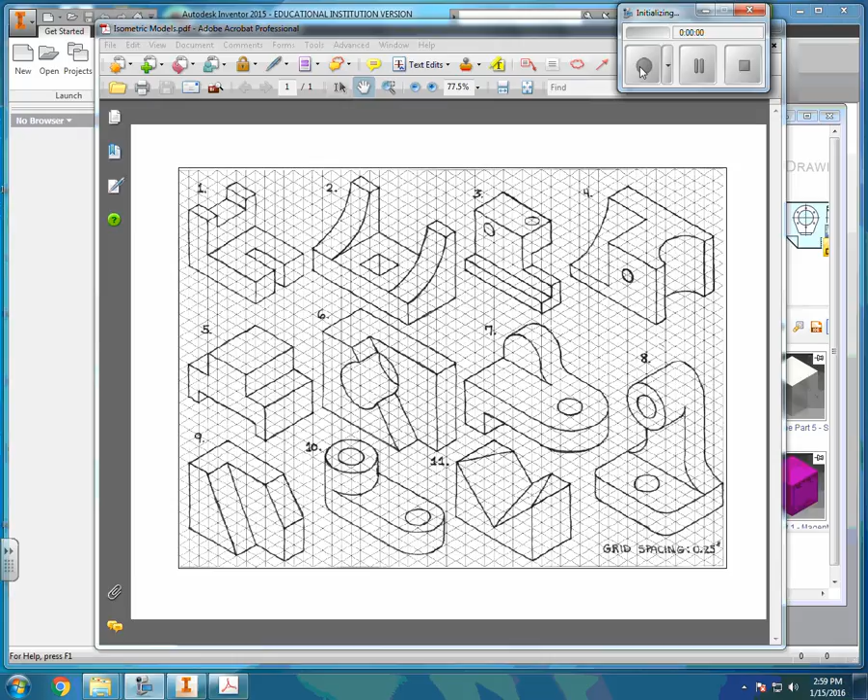Welcome to the tutorial for isometric model number 11.

Here I'm going to show you the part that will be demonstrated in this tutorial. Number 11 looks like it starts with a block and then has two triangles. It looks like we might have to use the loft cut feature to cut this triangle part. You might think you could use the extrude cut feature on the triangle, but they are in two different sizes, so I'll show you how to do that properly in Inventor.

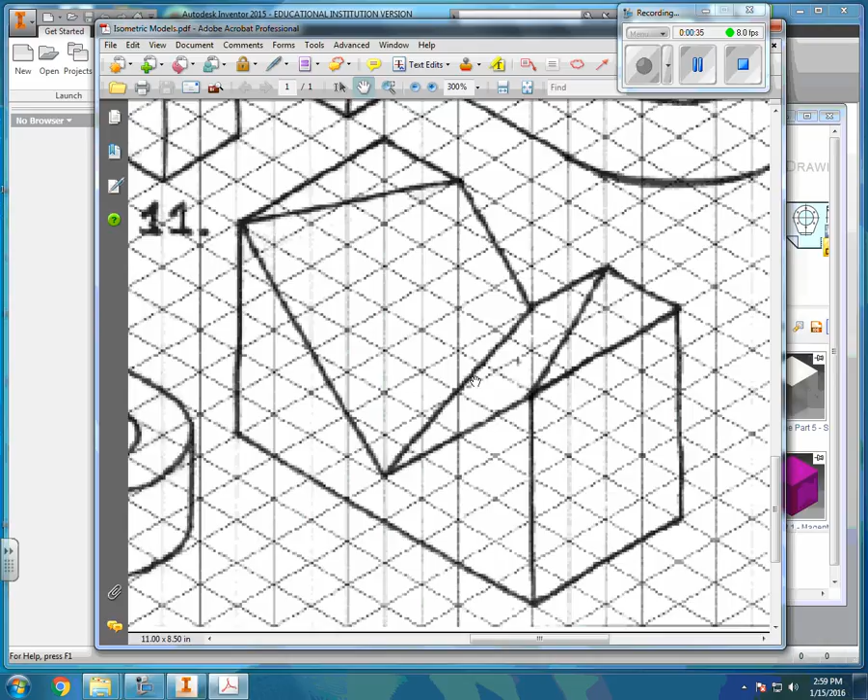Go ahead and open up Inventor. I'm going to minimize this so you can see what the part looked like that we'll be modeling for this tutorial.

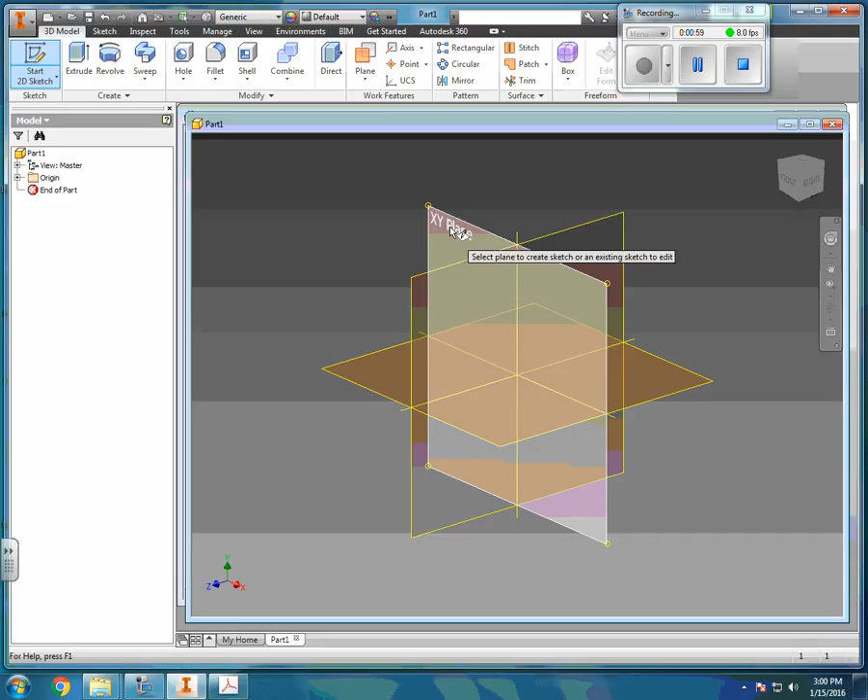Now that Inventor is opened, I'm going to create a 2D sketch. It's going to bring up the work planes here. I'll click on the XY plane and create a 2-point rectangle, lock it at the 0,0 coordinate, zoom out, and create the triangle.

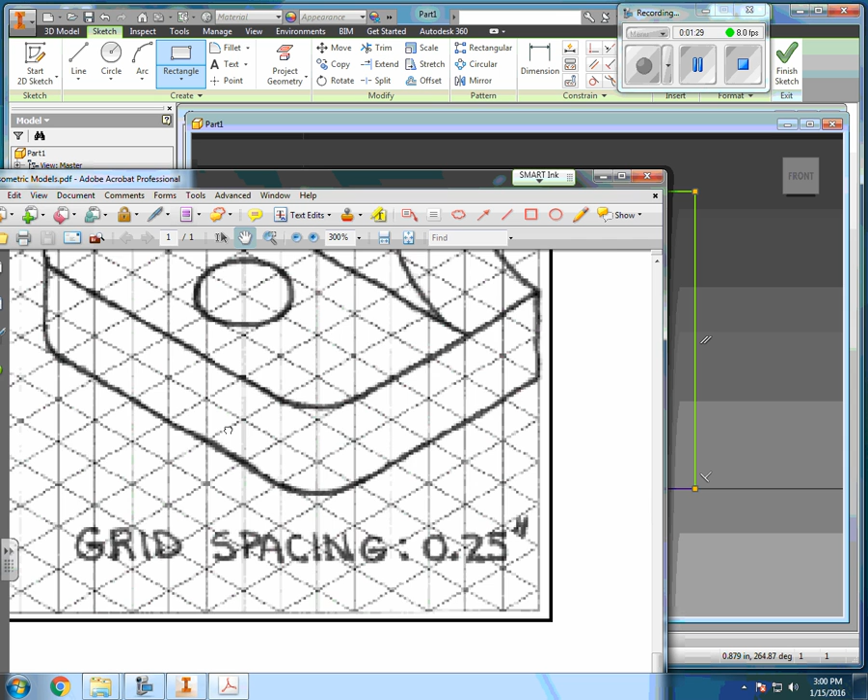I don't have to be exact because I have the dimension feature to set it. Now if I look at my part and count how many blocks there are, remember the spacing is 0.25 for every grid space. So it looks like 2, 4, 6, 8 - the length of this front view is 4 and the height is 2.25.

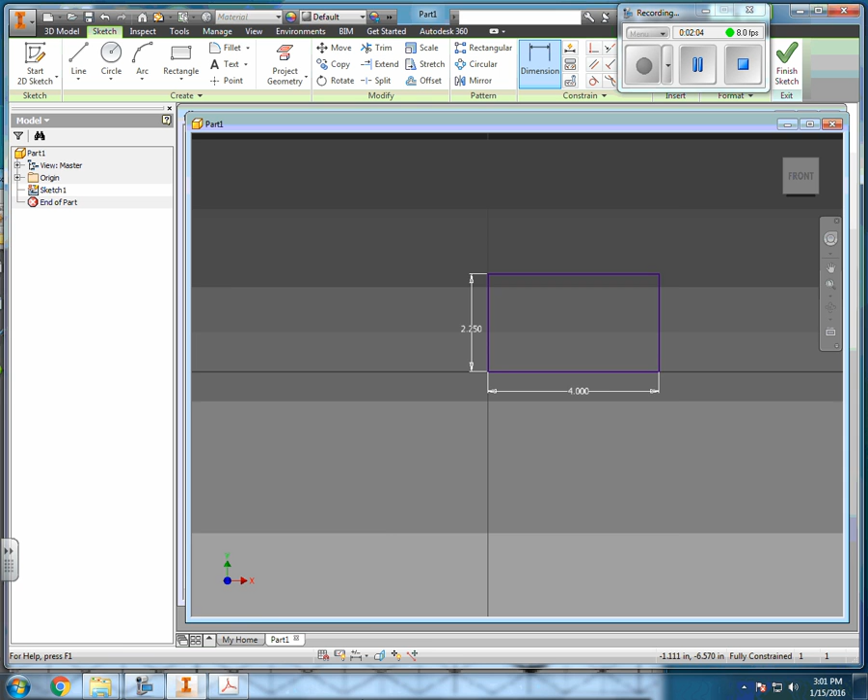So I'm going to dimension this length. It was close, but it's actually 4. Let's see how close I was here - closer. And set that to 2.25, and now I have a block set to the front part of this shape.

Now if you look at the shape, ignore the triangle for now because we're just going to create this box, or rectangle, and extrude it. I'm going to look at the depth of this rectangle - looks like it goes back 8 spaces, which will be a depth of 2. So with that, I'm going to finish the sketch.

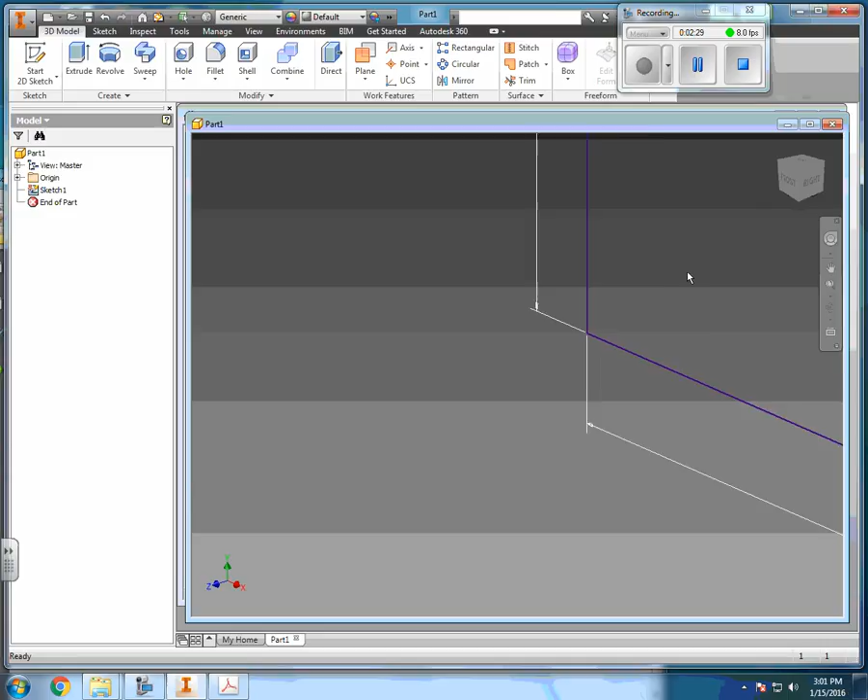When I finish the sketch, I'm going to extrude. I like to put it in the back direction, but you can choose forward, back, or equal distance. Go ahead and bring it back - we looked at that and said it was at a depth of 2. I'm going to hit OK. So there is my block.

But now what you notice from the drawing is that there are these 2 triangles, right? So there's one triangle here and one in the back. Let's go ahead and draw this first triangle.

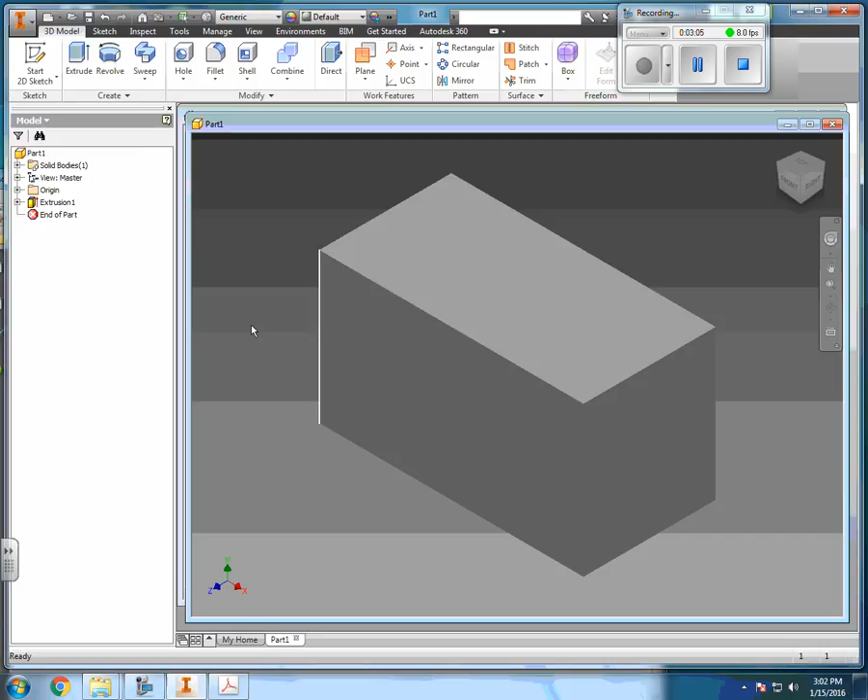I'm going to go back and create a 2D sketch on my front view. I'll use my line feature to draw my triangle, trying to pick up the midway point because I see from the isometric model drawing that the triangle actually meets that point.

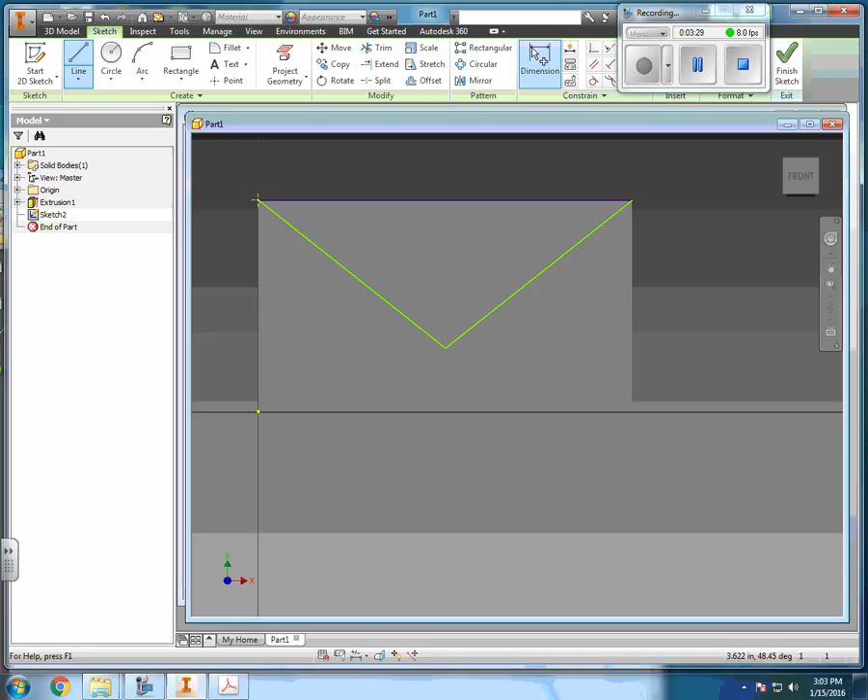Once I do this, I'm going to go to dimension and set my constraints for this triangle. What I notice here is the distance of the point of the triangle to the edge is 0.25. So I'll dimension the edge to the point, and it looks like it was at 0.25, 1 block. Now you notice how yours might not do this, but mine did.

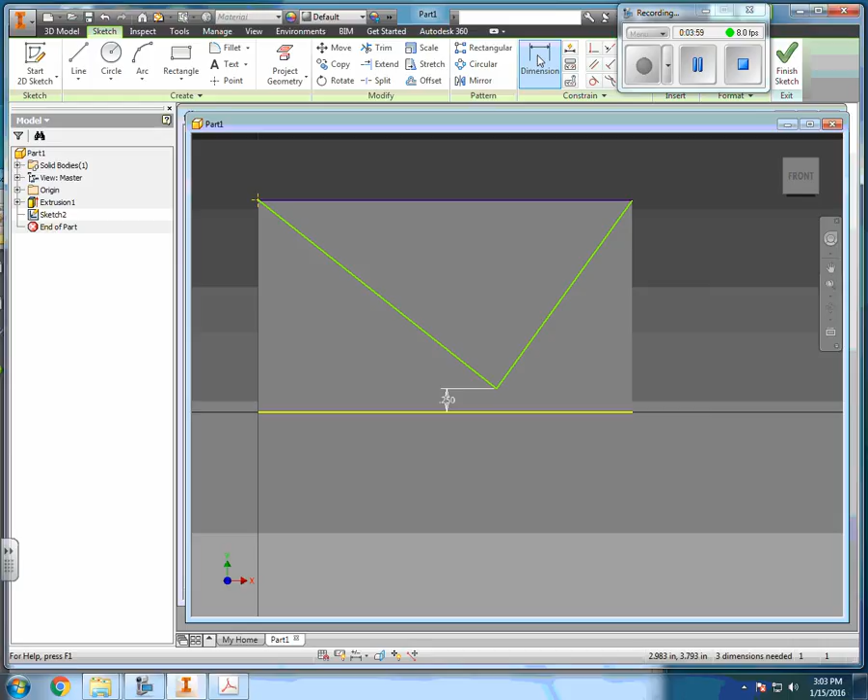It actually shifted, because I have to constrain this to the other edge of this block. As I said earlier, if my total length is 4, it looks like it's constrained at the center, so I can do a trick here and go 4 divided by 2, or you can just type in 2. Just wanted to show you that.

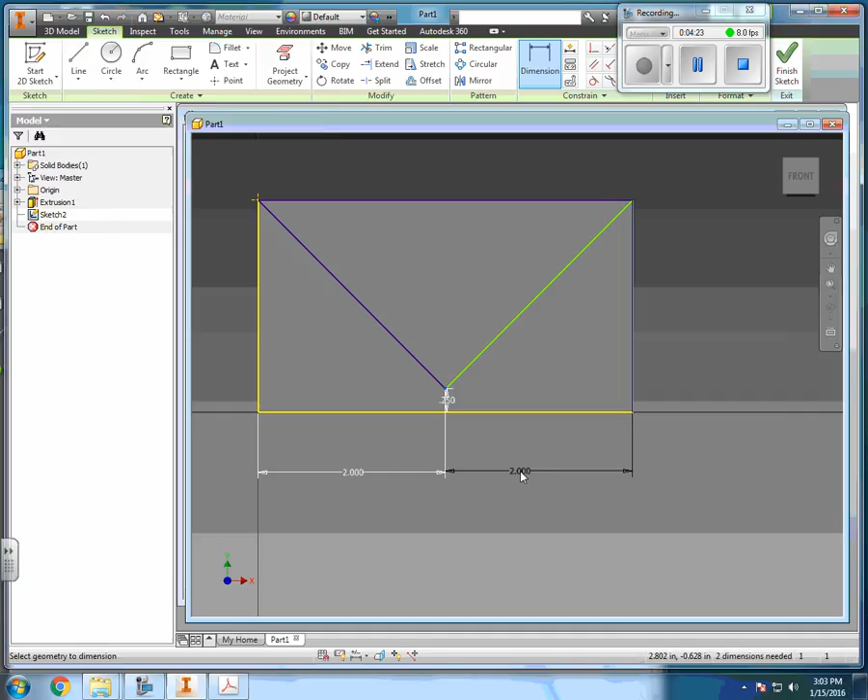Now this line is green, so I'm going to see if maybe I can constrain that too. Once I've completed this sketch, I'm going to finish sketch, and you can see my front triangle is here.

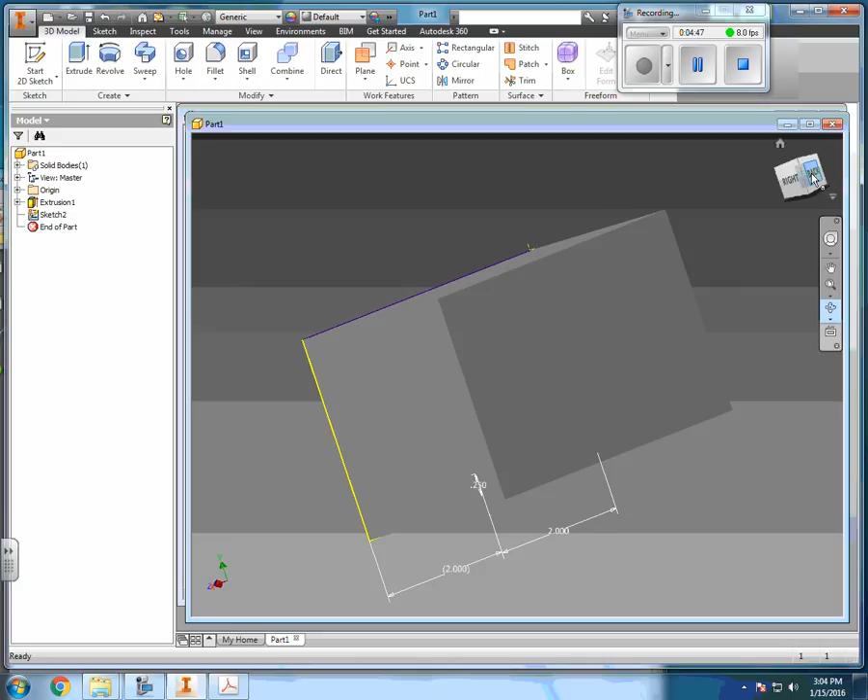This time, usually we'd go ahead and hit extrude, but if we were to do that, it would extrude straight back, and that's not what we want. So what we need to do is create another sketch in the back of our block, which will accommodate for the small triangle back here that we need to loft cut to. I'm going to create a sketch in the back.

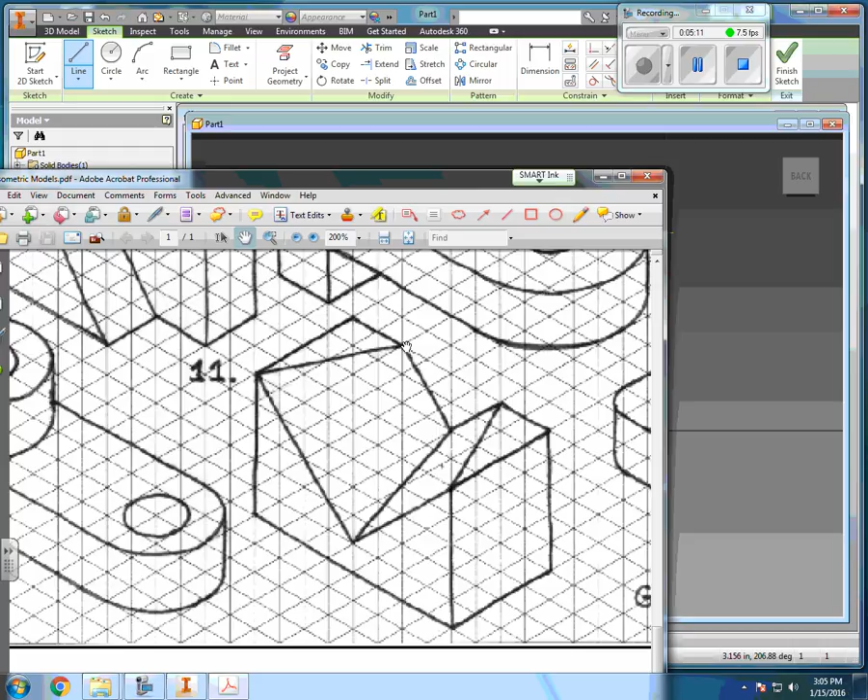That should take you to sketch 3 if you followed the order I did here. I'm going to create a triangle, and this time you can tell from the drawing that the triangle doesn't meet at the very edge - it comes out 0.5 from both ends and then dips down. I'll draw the line and drop it on this line, trying my best to lock it in the center, but we can adjust that later.

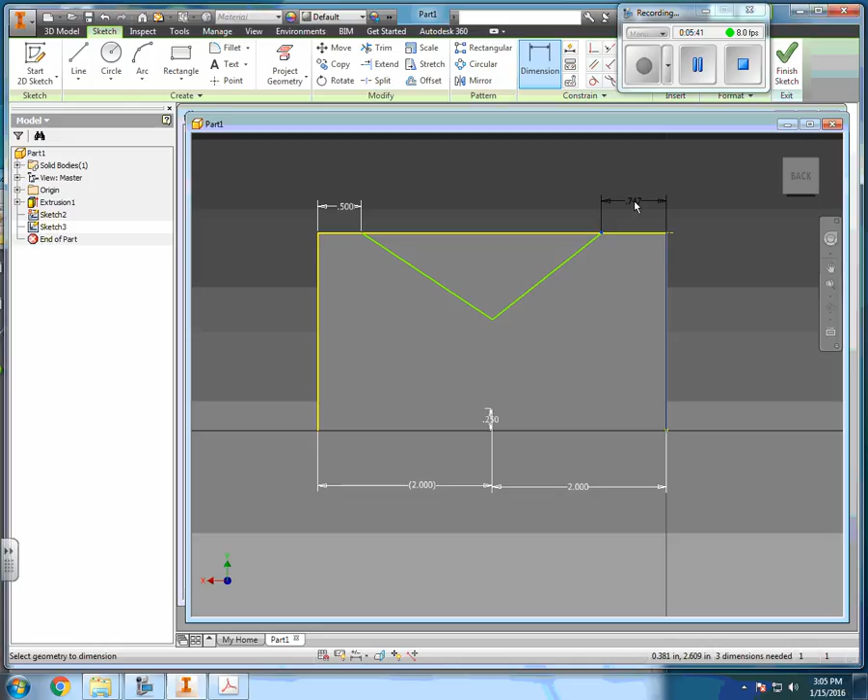I'm going to hit dimension. Remember, if you look at it, it was 0.5 - yep, 0.5. I'll do this at 0.5, then dimension the bottom edge, which looks like it's at 1.25. My final dimension will be here - so close, it's 2.02073324, but I just want that at 2. Now that is constrained.

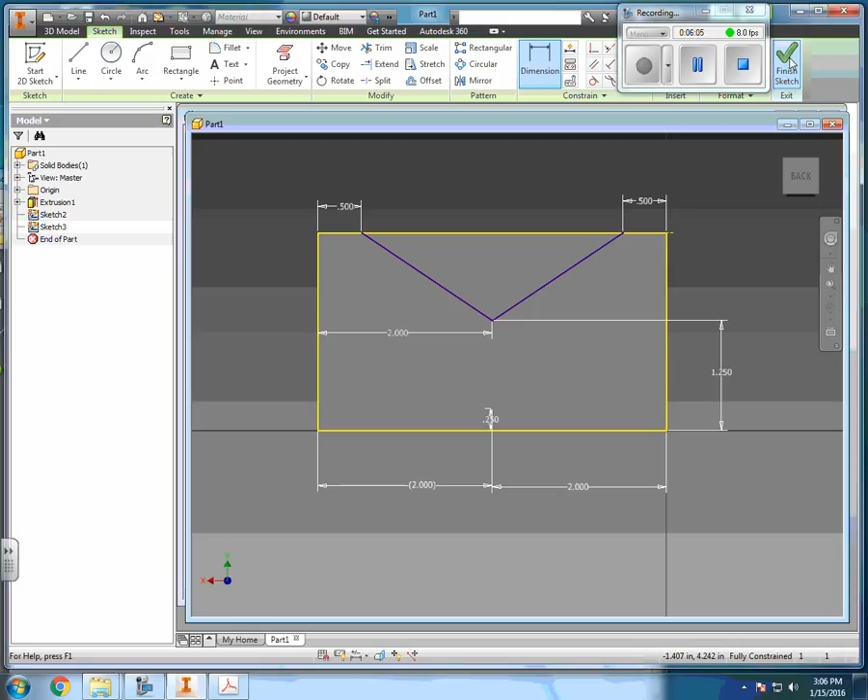Once you have your triangle established, go ahead and finish your sketch, and go back to my cube here. Okay, so now I should have 2 sketches on my browser.

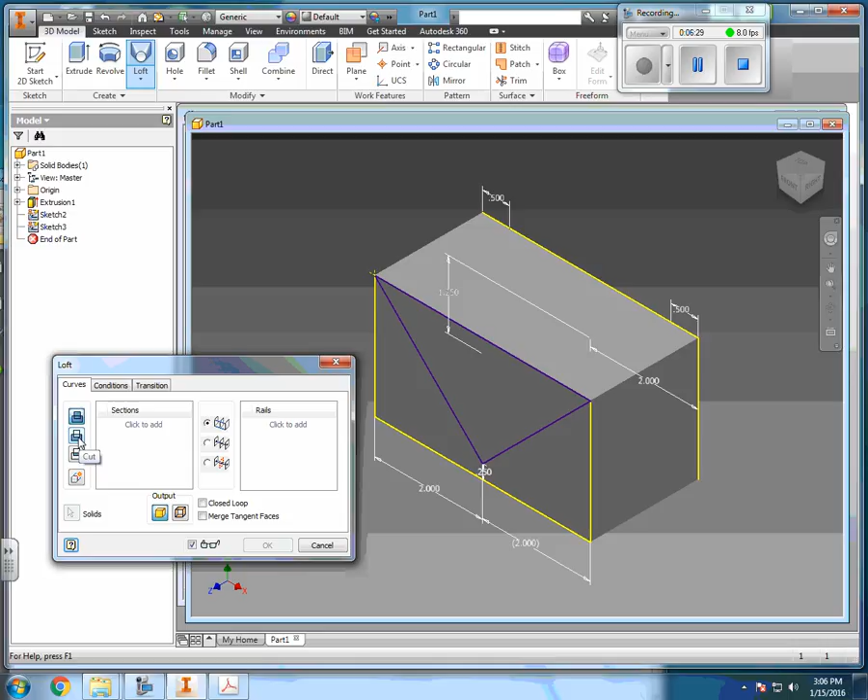What I'm going to do now is go to the sweep command - actually I need the loft feature, which you can also find under the sweep command. Under loft, it's default at join, but I really want it to loft cut. It says sections to add, so I'm going to select a sketch.

I'm going to select sketch 2, and select that triangle part in sketch 2. Click to add. Then I'll select sketch 3 for the back, hit OK, and that should give you the loft cut for isometric model number 11.

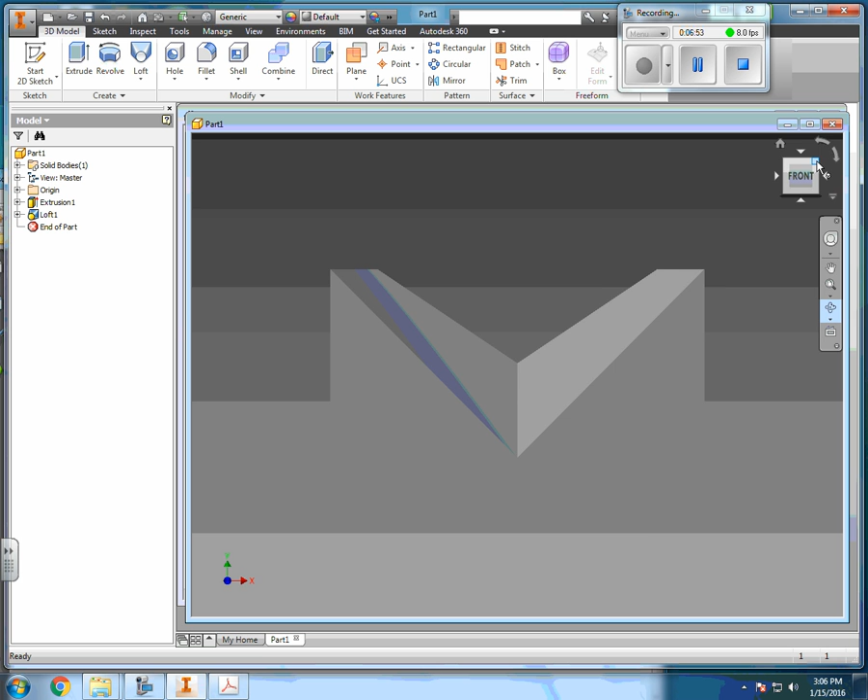Go ahead and put that in the isometric view, and that should look right if you did it correctly. We'll find out when you guys dimension it, but this is what you just modeled in Inventor.